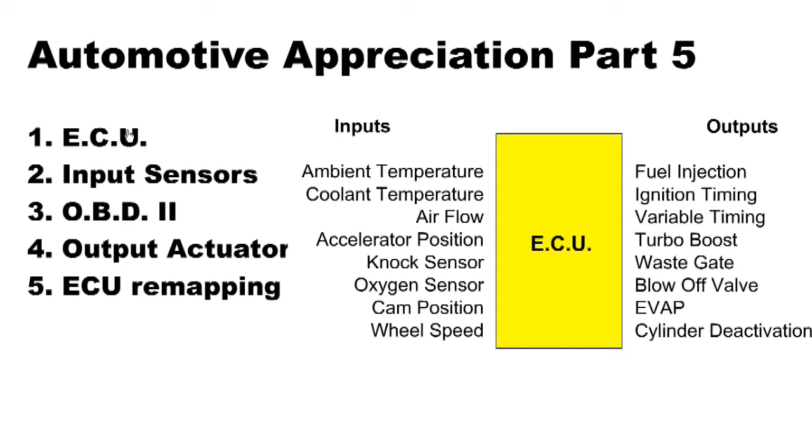Hi, welcome to Automotive Appreciation Part 5. This course looks at automotive control systems, the electronic control unit, input sensors, onboard diagnostics, output actuators, and ECU remapping.

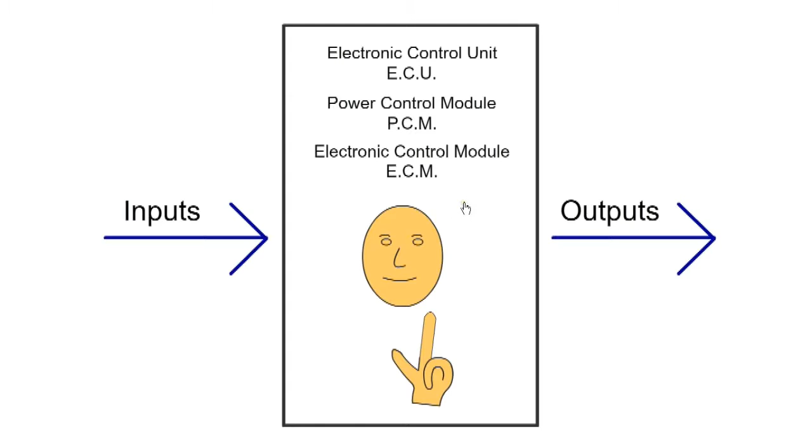The ECU is the electronic control unit, or sometimes called the PCM power control module, or ECM electronic control module. It's the brain and it does the thinking. It works in a harsh environment and is subjected to temperature variations, electromagnetic fields and high vibration.

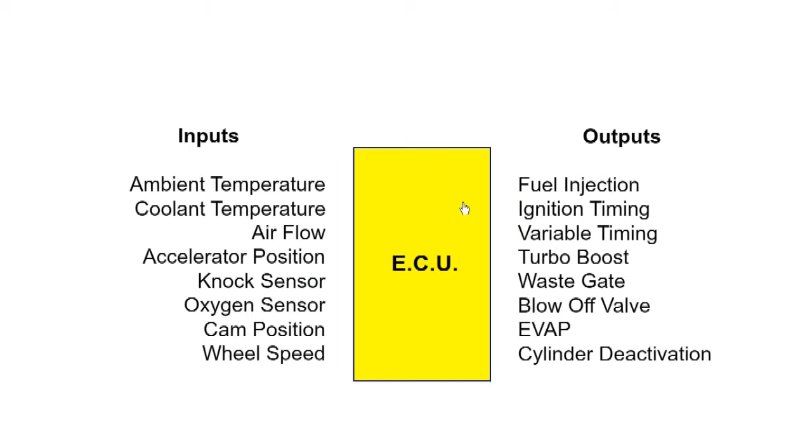First we look at the sensors which input information to the ECU. Speed pickups are based on inductive or magnetic speed sensors. When a toothed ferrous wheel moves past the magnetic sensor, it excites a voltage in the pickup coil, producing an electrical analog waveform. The frequency of this waveform is proportional to the speed of the rotation. They are used for crankshaft, camshaft, and wheel speed sensors.

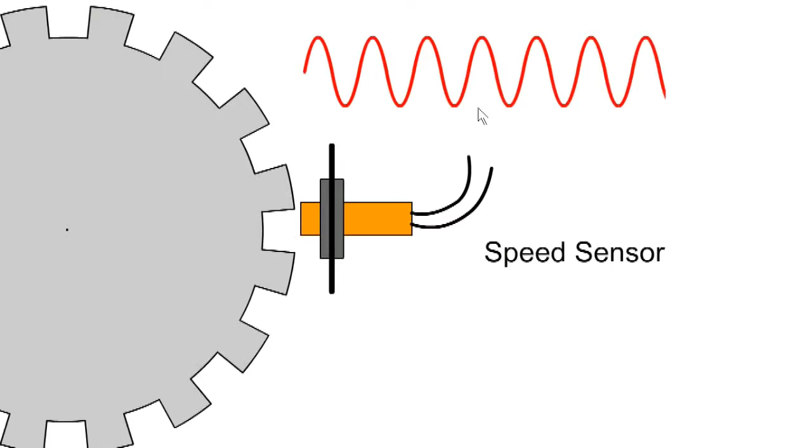The angular position sensor uses a resistor or potentiometer to determine position. As the wiper moves, the resistance is varied and provides a signal to the ECU. They are used for accelerator position and fuel level measurement.

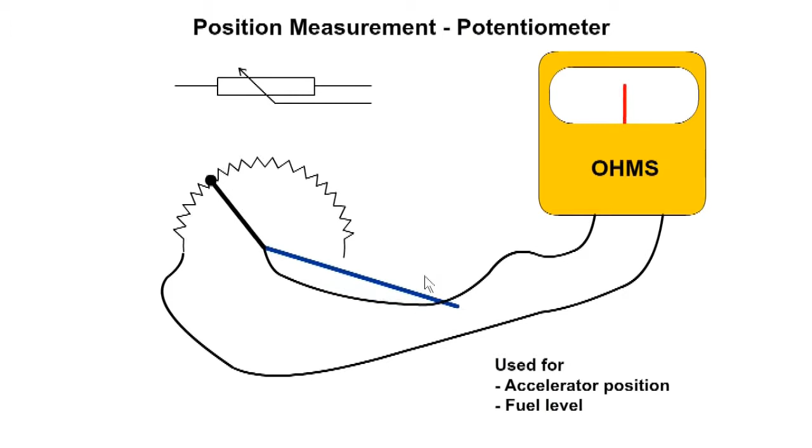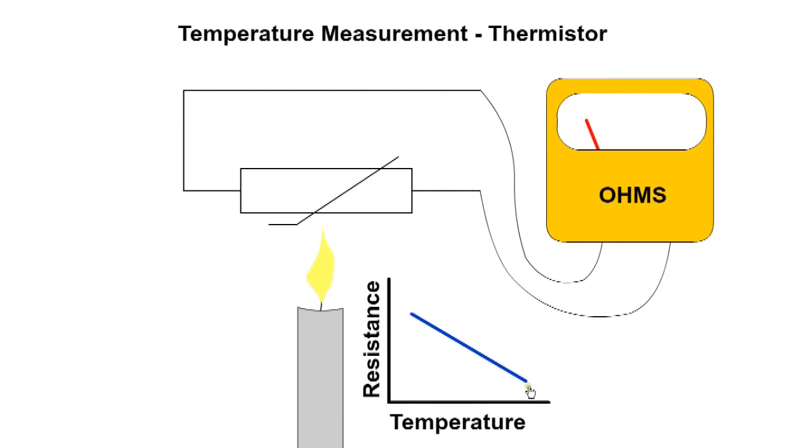Temperature sensors use a thermistor which is sensitive to a change in temperature. It has a negative temperature coefficient. The resistance of the thermistor decreases as temperature rises. They are used for intake air and coolant temperature. When resistance decreases, there is an increase in current, which is converted to a voltage signal for the ECU.

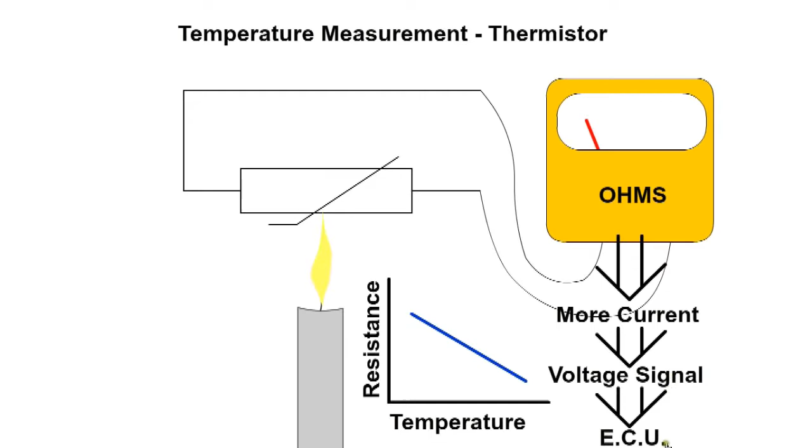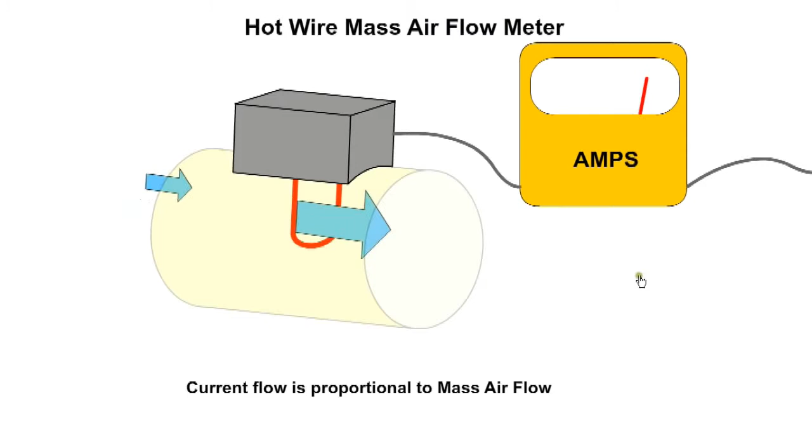When more air flows over the wire, it is cooled. Resistance decreases, allowing additional current to flow until equilibrium is again achieved. The ECU uses the amount of electric current flowing to the heater to determine the mass of air flowing into the engine. It takes into account the temperature and density of the incoming air, and additional correction factors are not required.

The knock sensor allows the ECU to listen to the engine. It is based on a vibration sensor which consists of a piezoelectric element and is attached to the engine block. The energy from the vibrating cylinder block is converted into an electrical signal for the ECU. When the onset of combustion knock is detected, the ECU will make appropriate alterations to the timing.

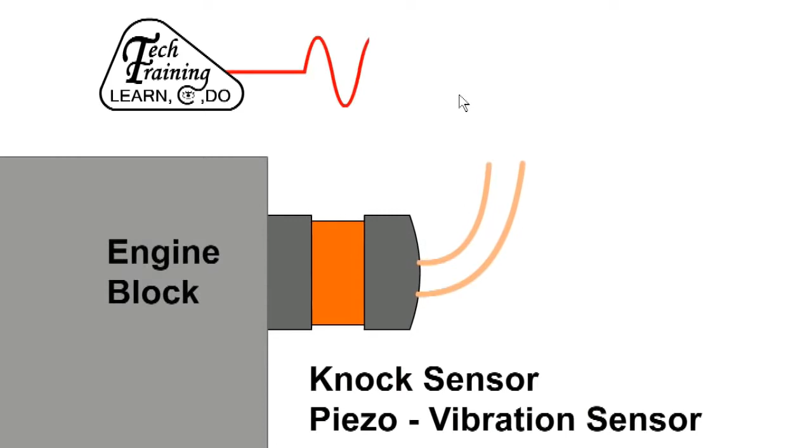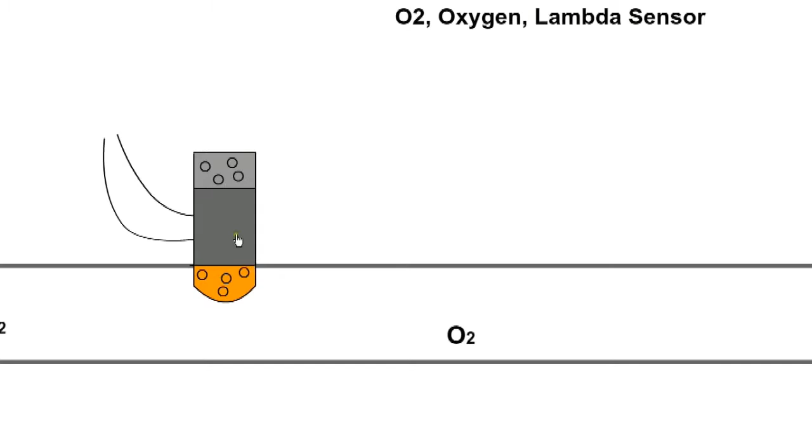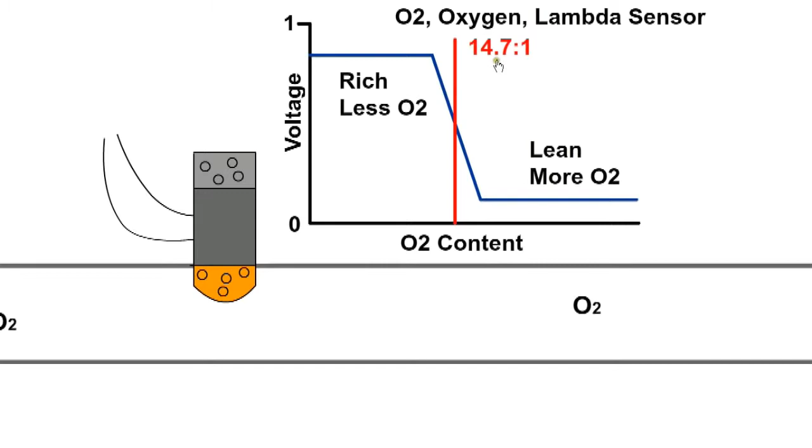The O2, oxygen or lambda sensor measures the amount of oxygen in the exhaust gas compared to the oxygen in the outside air. It generates a voltage from almost 1 volt in rich conditions to near 0 volts in leaner conditions, and the signal is sent to the ECU. The ideal air-fuel ratio occurs near the change from 1 volt to 0. For a petrol engine, the ideal air-fuel ratio is 14.7 to 1 by weight.

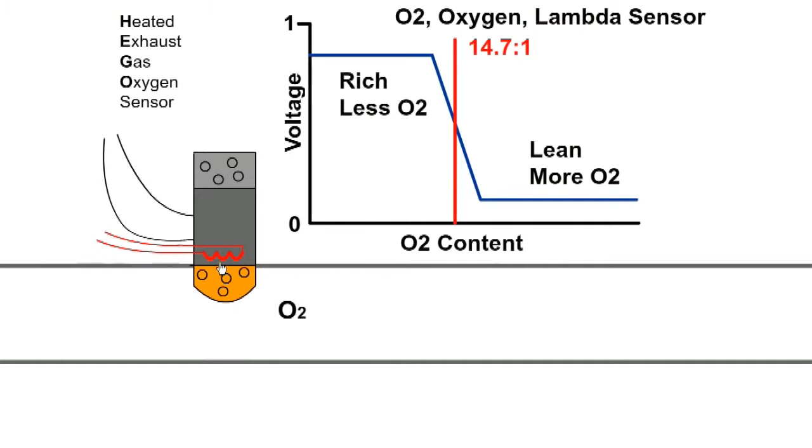Sometimes a HEGO sensor is used. This includes a heating element which gets the sensor up to working temperature faster.

We will now look at the outputs from the ECU. Ignition timing regulates the timing of the spark relative to top dead center. A signal is fed from the ECU via a relay to the relevant HV coil pack, which is located on top of the spark plug. The coil pack transforms the signal to high voltage for the spark plug.

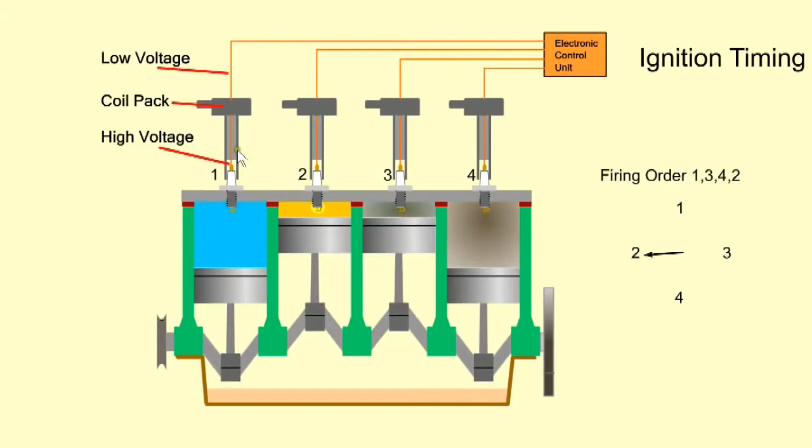Cylinder deactivation: on some cars it is possible to shut down some of the cylinders when not required, usually when cruising at light load. This is achieved by a movable cam which is splined onto the shaft. When the cylinder is not required, the cam for both inlet and exhaust valve is moved away from the cam follower, leaving the valves in a closed position.

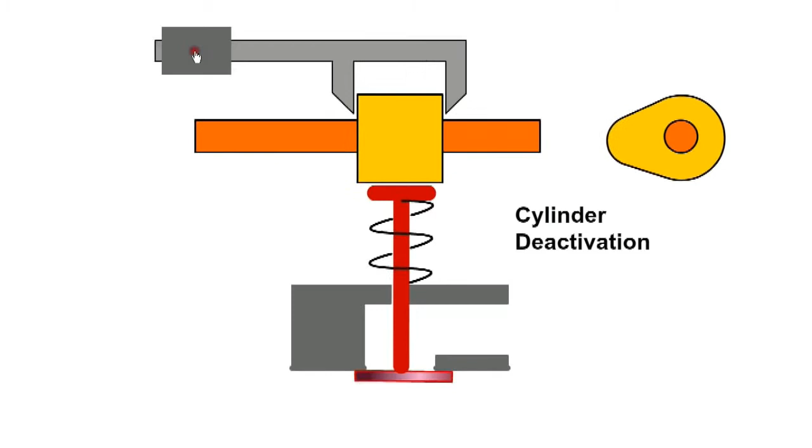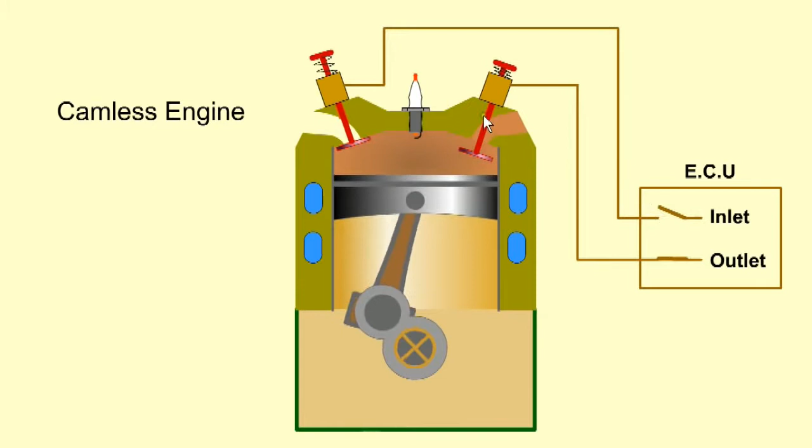A further development with the operation of valves is the camless engine. It does not have a camshaft and relies on electrical solenoids activated by the ECU to operate the valves. This allows immense flexibility with the control of timing and lift of both the inlet and exhaust valves.

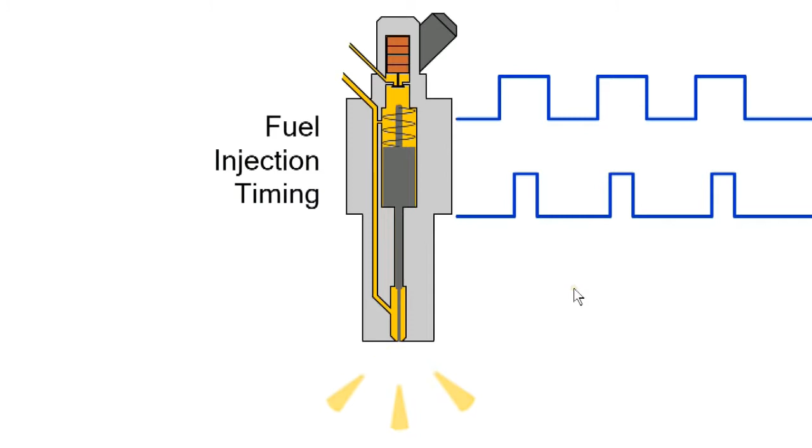Fuel injection injects fuel according to inputs from the accelerator, airflow sensor, and common rail fuel pressure sensor. Fuel quantity can be varied by altering the length and number of fuel injector pulses. When operating in closed-loop control, fuel injection is determined by the exhaust gas oxygen sensor.

Most cars have separate ECUs for different control systems, with each ECU having inputs and outputs. For example, the anti-lock braking system would have a separate ECU to the engine management ECU. All the information is transmitted between the ECUs using a bus system called a controller area network, or CAN system. Each ECU is programmed to accept relevant information if required, for example, road speed might be relevant to a number of control systems.

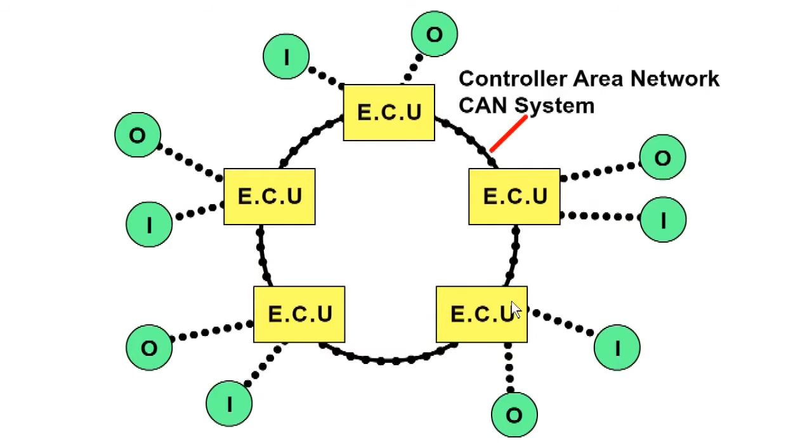Here we see an engine control system in operation. When the engine is started and still cold, fuel injection is determined from the amount of air flowing into the engine. The engine will have additional fuel and run rich. This is called open loop control.

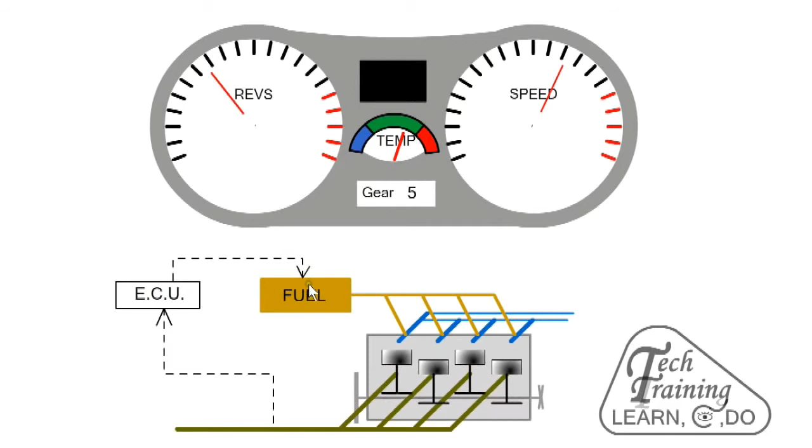When the engine is up to temperature and cruising, the ECU will use the feedback from the exhaust oxygen sensor to determine optimum fuel injection, thus reducing emissions and fuel consumption. This is called closed loop control.

If the lambda probe should fail, the control system will revert to open loop control as there is no feedback from the oxygen sensor. It will alert the driver via the engine management light. Fuel consumption and emissions will be higher, therefore the car should be taken to a garage for repairs.

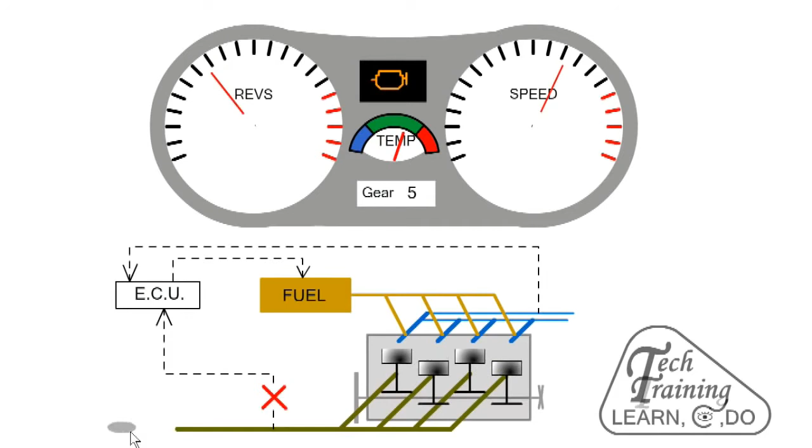The OBD2 standard, Onboard Diagnostics 2, allows code scanners or data loggers to communicate with the ECU. Fault history and fault codes can be downloaded to determine which sensors are not healthy.

Caution must be exercised when using a fault scanner, as quite often when there is a faulty reading from a sensor, the source of the problem might be elsewhere in the system. Also, high resistance electrical cable connections can lead to erroneous readings, so check everything, and as a last resort, change the sensor.

Manufacturers program the ECU according to their requirements, and this information is a closely guarded secret. Normally engines are not operated to the limit, and the designers allow a comfort zone, allowing for extreme ambient conditions or poor quality fuel. Recently there has been an emphasis on energy efficiency and fuel economy.

However, there are tuning companies which specialize in deciphering the program and modifying it, usually to produce more power from the engine. This is often referred to as a chipped ECU.

Here we look at a basic example of an ECU map, graph, or lookup table. The input is the accelerator position sensor and the output is throttle position. In the past they were directly linked by the accelerator cable. Now fly-by-wire is used. For this demo both have a range of 0 to 100%. As the accelerator is pressed, we get a corresponding change in throttle position according to the graph. At 60% accelerator position, the throttle position is also 60%.

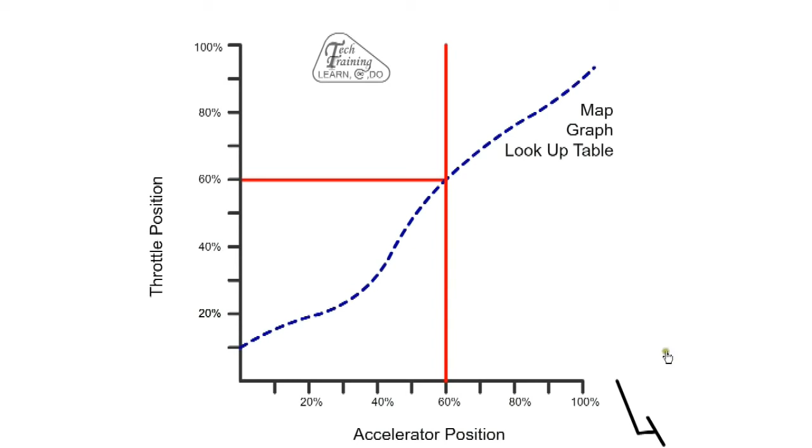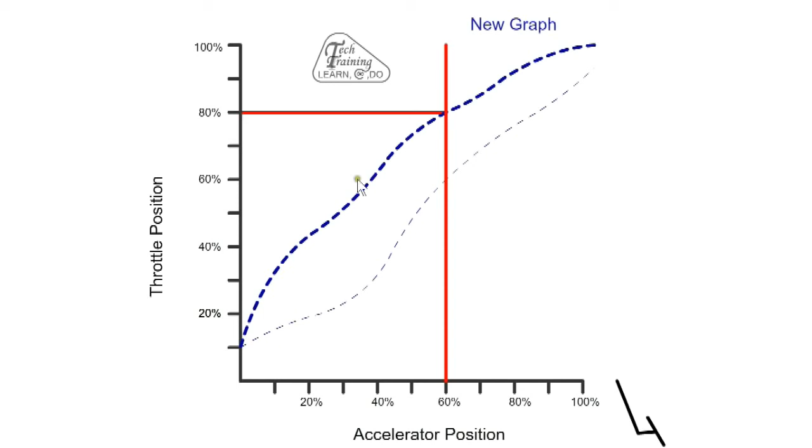Assume the driver wants a more responsive engine and gets the ECU remapped with new software. Now with the new graph, instead of 60% we have 80% throttle opening. Some expensive cars have the option of switching between different programs stored in the ECU. In this case they are called Sport Mode and Economy Mode.